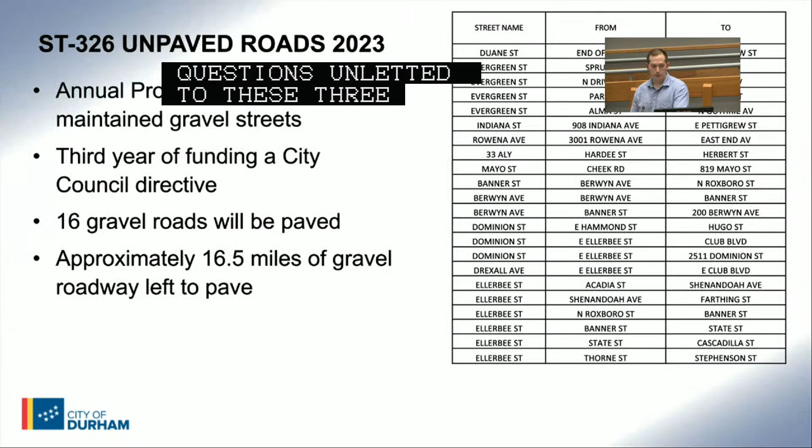So first, we have ST 326 Unpaved Roads for this year. It is essentially us repaving all gravel roads or unpaved roads within the City of Durham. We get an annual allotment from the City Council. It is in its third year of funding, and we will be paving 16 gravel roads this year.

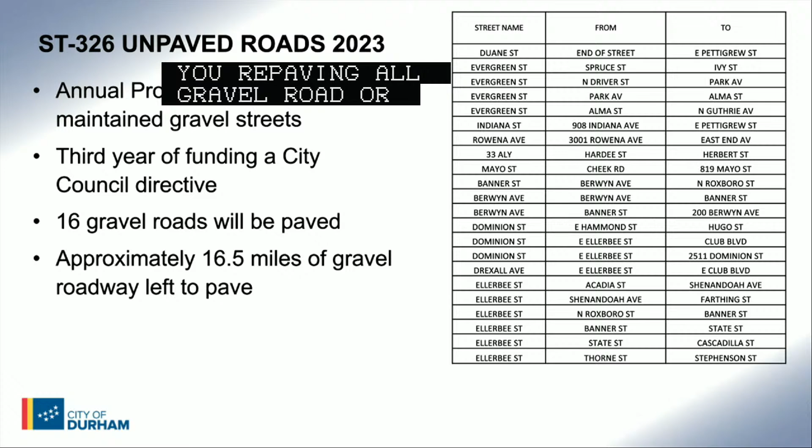We have it broken down on the website: street name, from-to intersection, all of them are gravel. We have approximately 16 and a half miles left of gravel road in the City of Durham to pave.

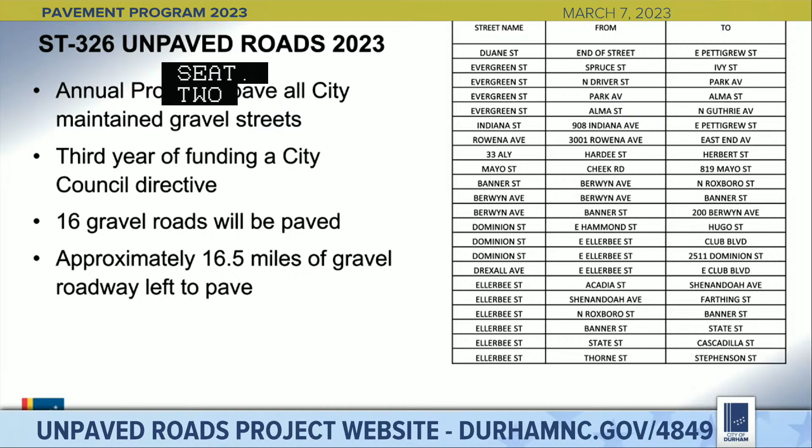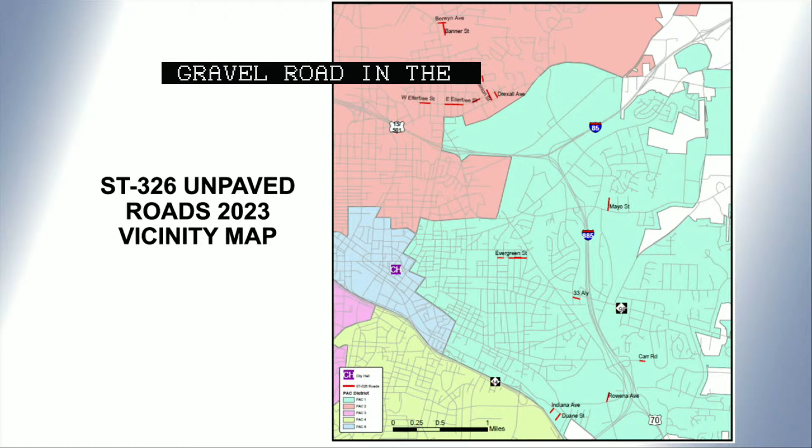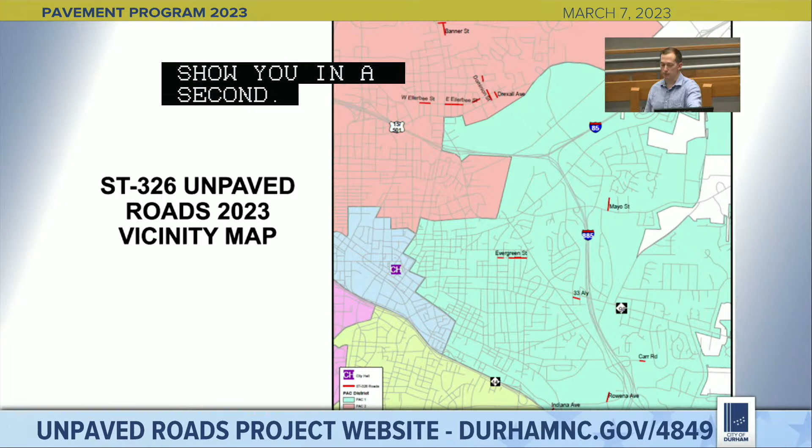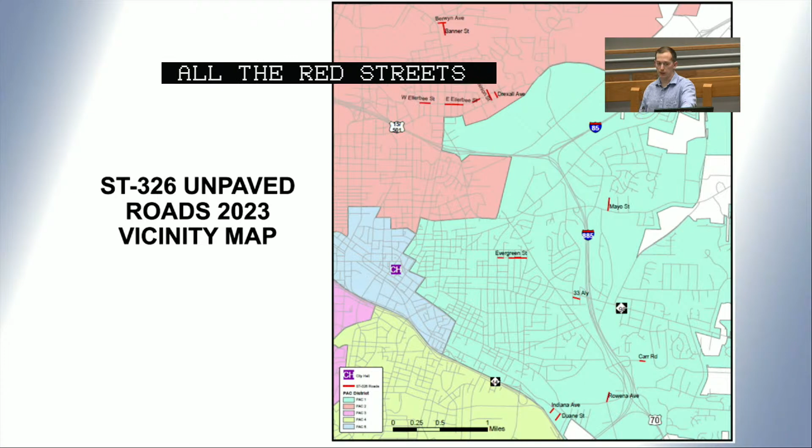This is the vicinity map. All three of these projects have a map on the web pages that I'll show you how to get to in a second. This is the ST 326 map for this year. As you can see, we are in the northeast part of Durham. All the red streets are labeled with their names, and those are the streets we are planning on repaving this year. Also, the colors denoted on this map are the PAC districts.

Project information: our contractor for lowest bid was Carolina Sunrock. We have consultant inspectors on this project, which is Summit Design and Engineering. We also have myself as the project manager for all three of these projects. The consultant for the inspection is the same for all three of these projects as well.

This is the project website, and I'll show you how to get to that real quick. In order to get to any of these project websites, you can go to the City of Durham homepage. Once you're here, you come up to Departments, and you click, and you come down to Public Works.

This will be the web page that shows up when you get to the Public Works Department. From here, you'll have the tabs on the left side. You want to come down to Construction, Design, Projects Active. Then on this page, all the projects are broken down into categories. This one is new sidewalk and trail - these are all of our active construction, design, or construction projects. Then you'll come down to street repaving, and you'll see that we have ST 324, 325, and 326.

Right here, for the sake of this example, we'll go to 326. On this page is where you can find a lot of the project information you might have questions on. You'll see the title at the top, then you'll have the project manager - in this case, it's me - and this is my phone number and extension. If you click this link, it'll take you directly to emailing me at my email for the city.

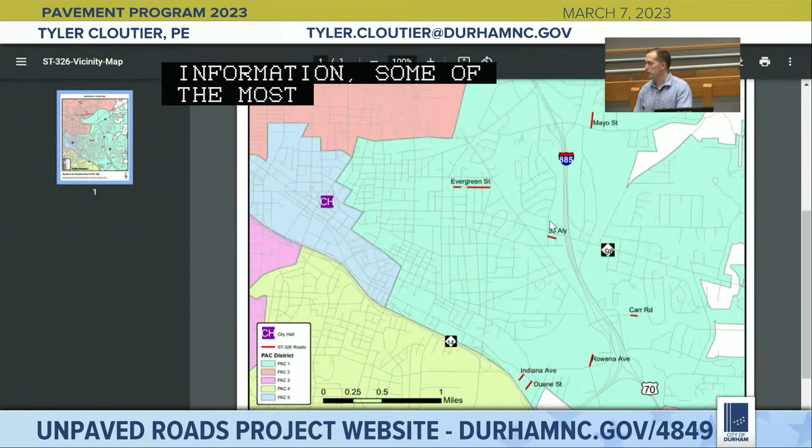Then you'll have a project description underneath that shows you what the project scope is, a rough project schedule with anticipated dates, and the project status. And then, most importantly, on the right side, you'll see we have project information - all sorts of information. Some of the most useful information is probably the street list and the vicinity map, the same map as what I just showed you, online on all these web pages.

And we'll be taking any questions that you might have for this. Any questions at all on this one? No? We're all good? Okay, all right. So with that, I guess I will move on. Anybody have anything to say on this before I move on? Clint? No? Nothing? All right.

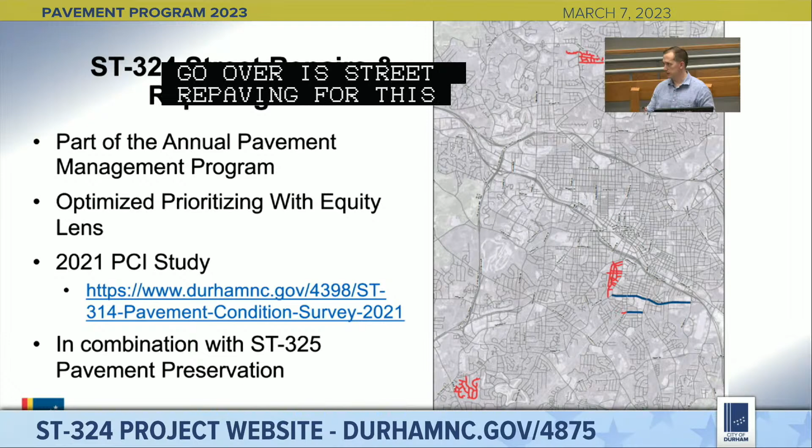So our next project that we will be going over is ST 324, street repairs and repaving for this year. It is your typical mill and fill repaving operation where we take off 3 to 4 inches of the surface and put back 3 to 4 inches, and you end up with a new road.

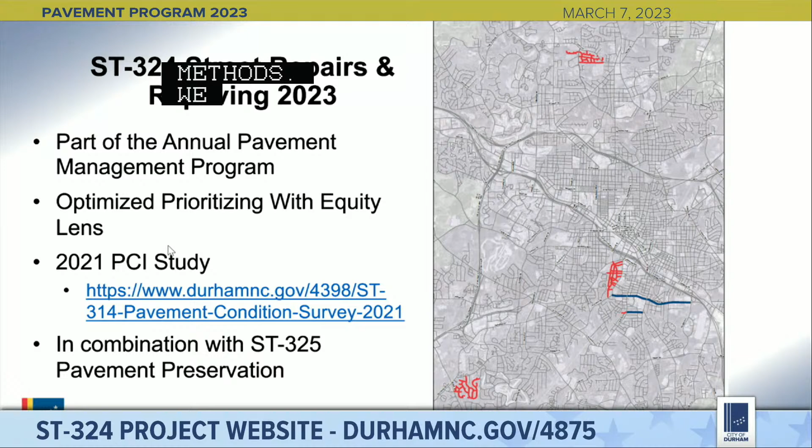This is part of our annual pavement management program, where we want to extend the life cycle of our pavements and save the city money by using various methods. We select our streets via a pavement condition index, which I'll talk about in a moment, and we select them through an equity lens.

So the pavement condition index is a PCI. In 2021, we had a PCI study done to get data on all of our roads and get a condition of the roads from 0 to 100, 100 being the best. It helps us select and identify roads to repave or preserve for the following years.

This work has to be done in combination with ST 325 for us to reach our goal of extending the pavement cycles of these streets within the city of Durham.

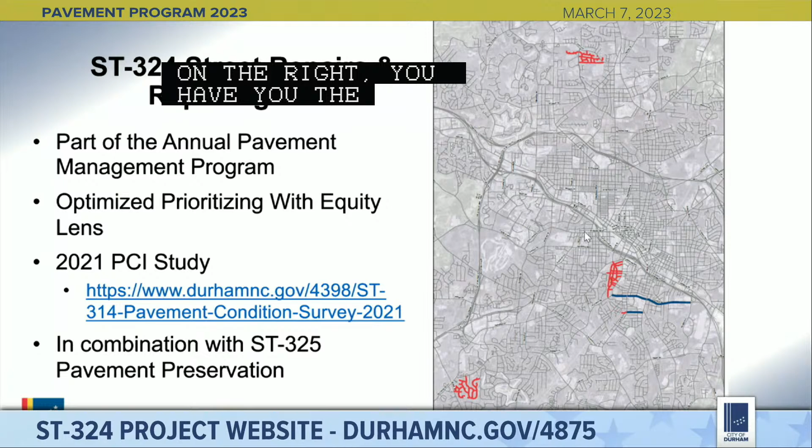On the right, you have the vicinity map for the roads to be completed, with what treatment they will be receiving. You can find that on the web page for ST 324 - same way I just showed you, just select ST 324 instead of 326, and it's on the right.

Project information for this contract. Our contractor with the lowest bid was Carolina Sunrock, same consultant, Summit, and same project manager, myself. This is the project webpage if you would like to see any up-to-date information on the project.

Anybody have any questions on this project? Yes, sir. Do you mind if I grab them? Oh, yeah, do you mind walking up to the microphone? Is that okay? Yeah, that's fine. Okay, I was going to say. Oh, okay, that works, yeah.

It works fine. Hi, I live in the Dover Ridge neighborhood, and the prior PCI survey that was conducted, I think 2016, 2017, our roads had a worse rating than the rating that came on this last one. And I'm wondering, if you're using this new one to judge the roads, what value did the last one have if you weren't really relying on it anymore?

So it's a combination. We are relying on that one where we're showing a progression. Sometimes, especially if a neighborhood's pretty stable, you might actually see it change because we did change the methodology a little bit in the way we did the new PCI study. So some of the roads actually appeared to improve when they really stayed the same. So we are showing a progression.

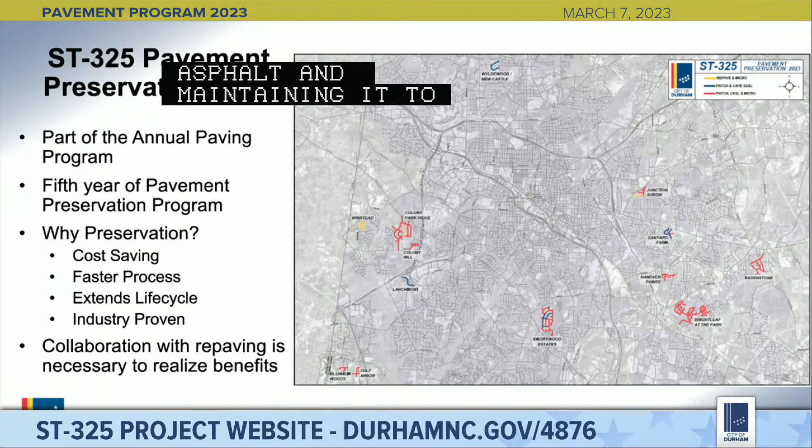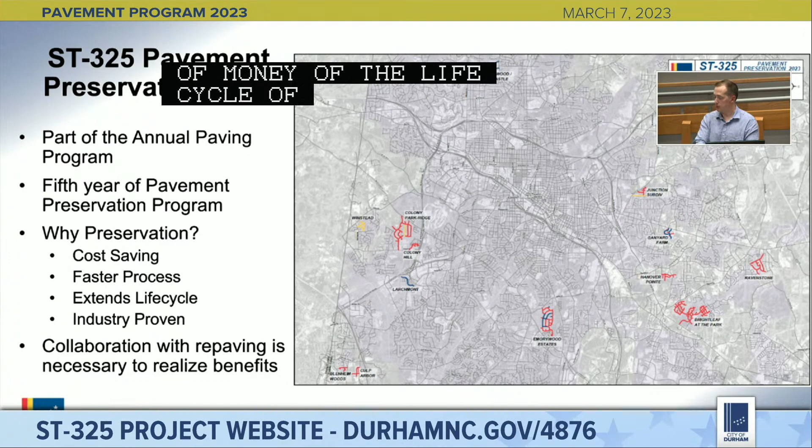Pavement preservation is essentially sealing the asphalt and maintaining it to extend its life cycle. A typical mill and fill operation like ST 324, without us doing this pavement preservation, the life cycle typically ends at 20 years. We are working on using this to extend those life cycles out to 50 years, which will save the city a lot of money over the life cycle of a road, and hopefully mean we'll be able to get to more roads per year, and we won't have to spend as much money rebuilding roads.

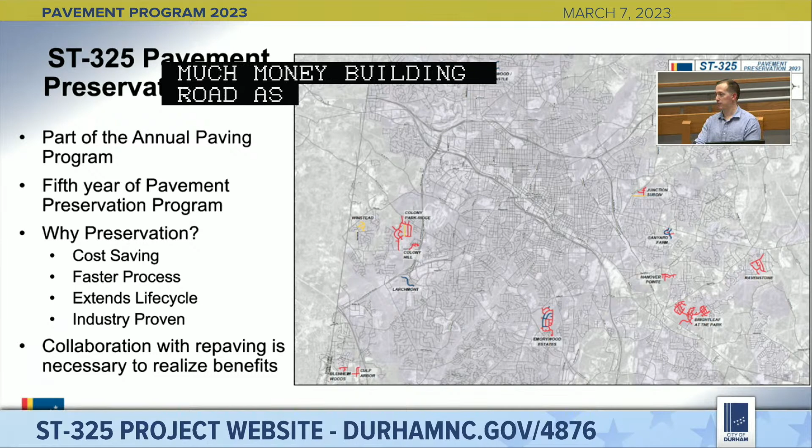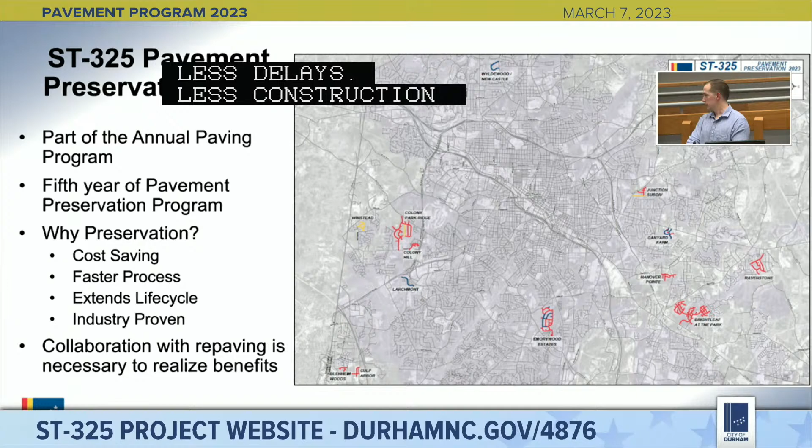So why preservation? Like I said, cost savings. It is 4 to 5 times cheaper to do preservation than it is to repave a road. It's a faster process, meaning less delays for the community, less construction traffic, less lane closure time, and it extends the life cycle.

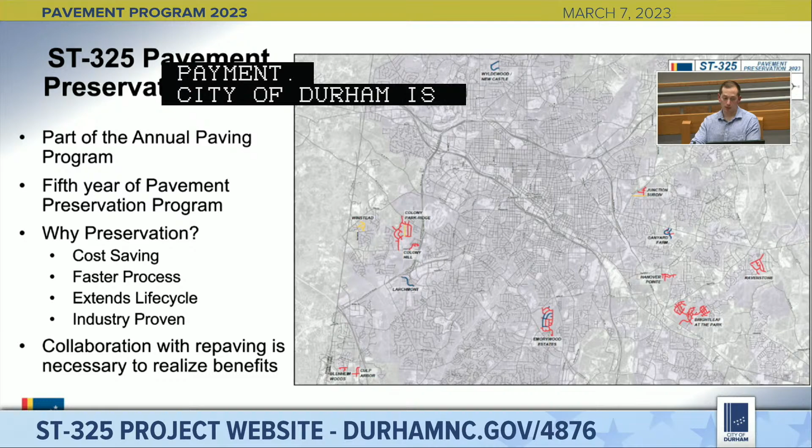This is also an industry-proven tactic to extend life cycles of pavements. It's used nationwide. City of Durham is probably one of the best in the state for its efforts on pavement preservation. And like I said on the previous slides, collaboration with repaving is necessary for this all to work as one and get to the life cycle goal of 50 years.

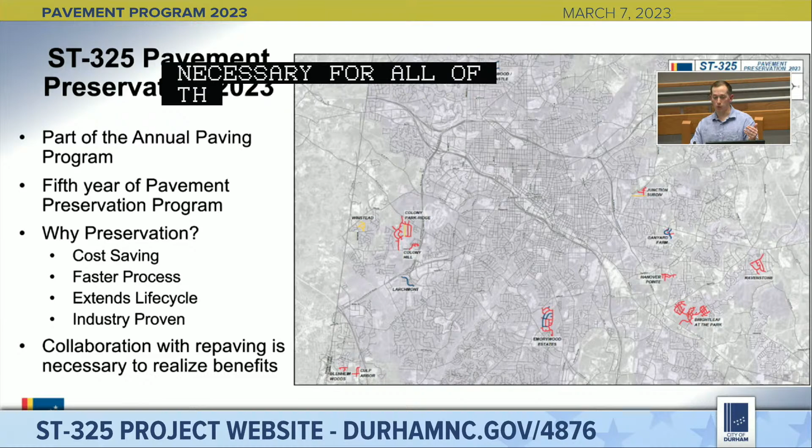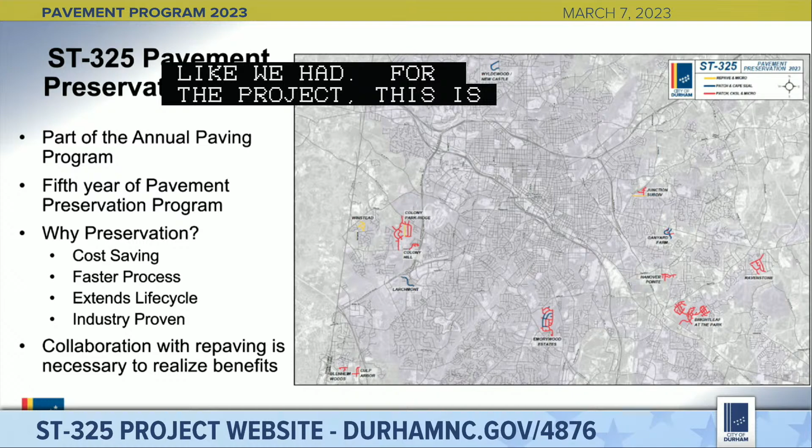For this project this year, this is the vicinity map up on the page. This can be found on the ST 325 website, along with all relevant project information, including my email.

Our contractor for this project is Slurry Pavers. They were low bid. Our consultant is the same as Summit. Project manager is the same. The project website is here on the page.

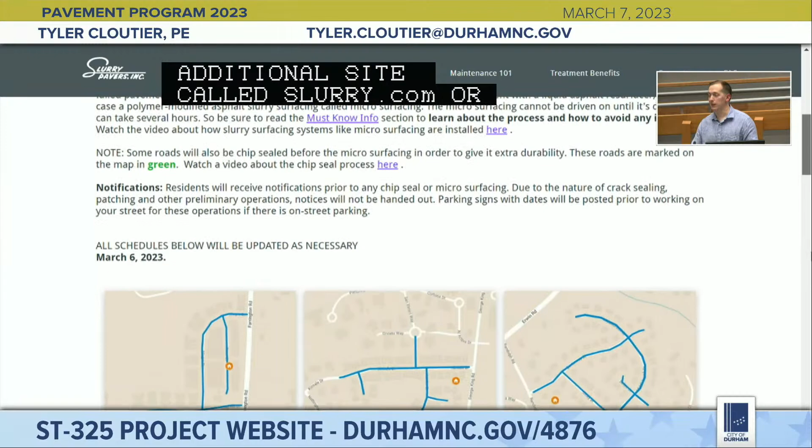We also have an additional website called neighborhoodslurry.com/Durham, but it's for Durham. This is a website you can use for very up-to-date and pretty detailed scheduling of what's going to happen within your neighborhood and when. There are all the neighborhoods listed, and there's dates associated with them, and this is the most recent update as of March 6th. So if you would like to go on there and check out your specific neighborhood, you could probably find a lot of the information you're looking for.

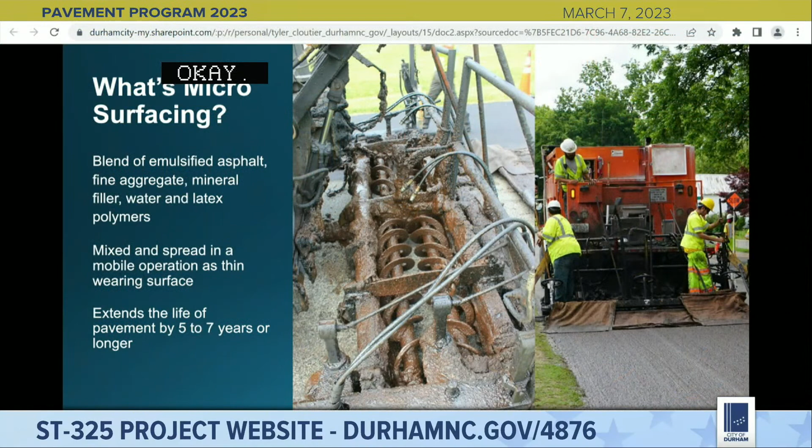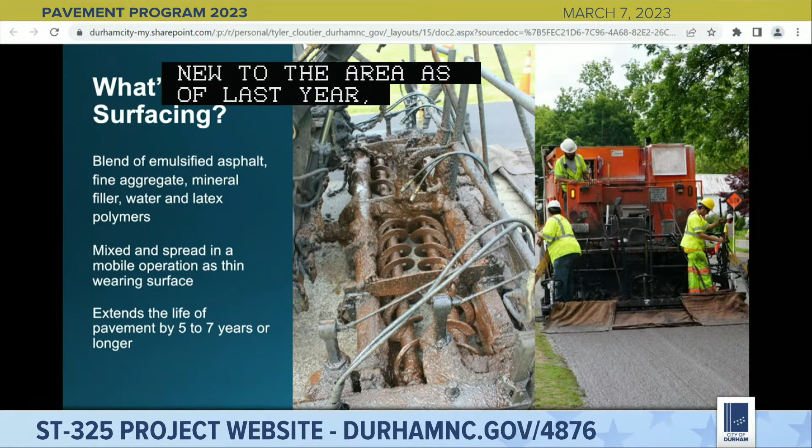Good evening, all. My name's Tim Herbst. I'm in charge of technical education and business development for North and South Carolina. New to the area as of last year, but been in the industry for over 25 years. I want to take this time to thank the city, Clint, Tasha, and Tyler, and administration for allowing us to partner with y'all. We're excited to again be back in Durham, and I want to show you a little bit about what microsurfacing and preservation is, and then why we do it.

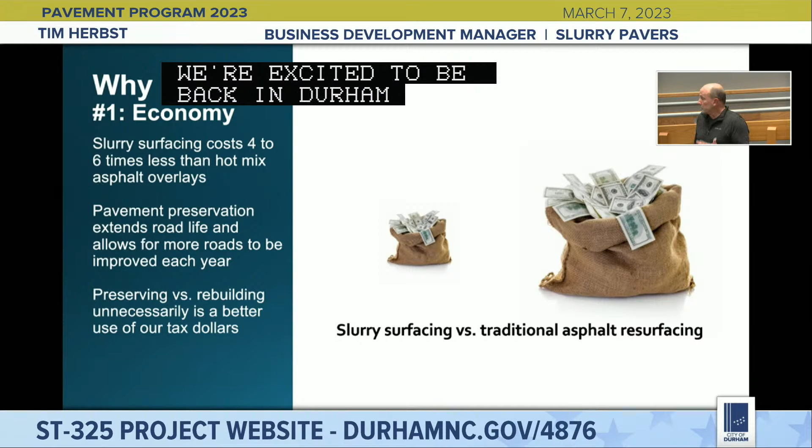First off, what is microsurfacing?

So we had the pavers in here, and we're basically taking a liquid asphalt cement, and we're creating an emulsion, which means that we're shearing in water into the asphalt. You do that, and think about getting grease on your hand, it's kind of hard to get off with water. How do you get that grease off? You introduce a soap, which in the industry is called a surfactant. So you blend that water and asphalt together to make an emulsion.

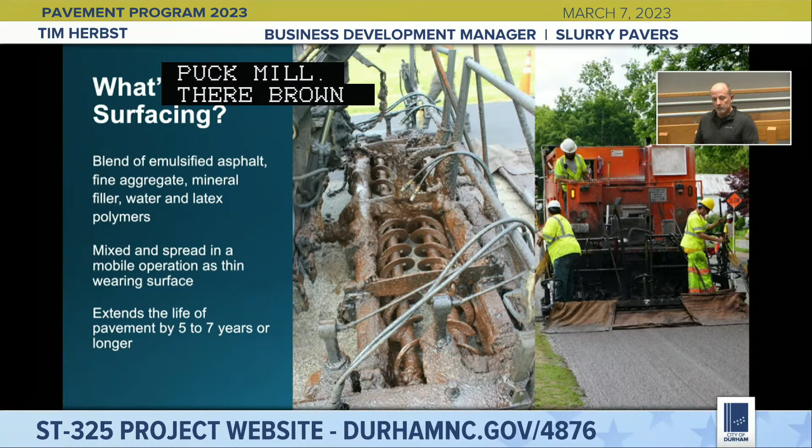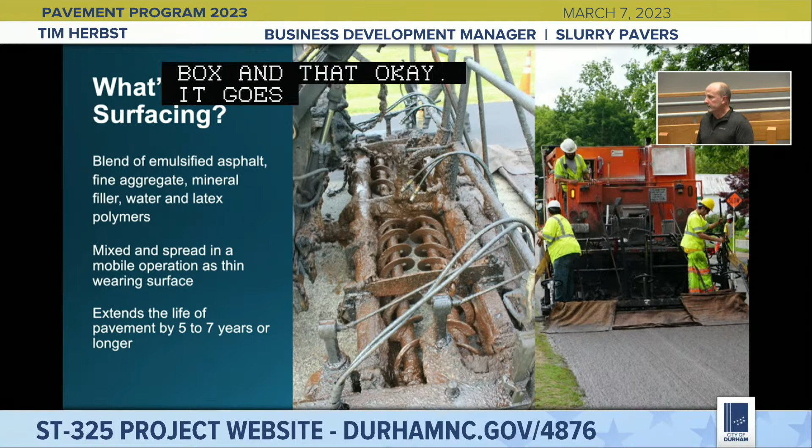It's mixed into the box, and as the paver goes down the road, very similar to a paving operation, it comes out the back end about 3/8 of an inch thick or thereabouts, and the design life is somewhere between 5 to 7 years. That's without doing any preparatory work to it. If you crack seal before it, or maybe do a chip seal before it, which the city calls Cape Seal, that life can be longer than that.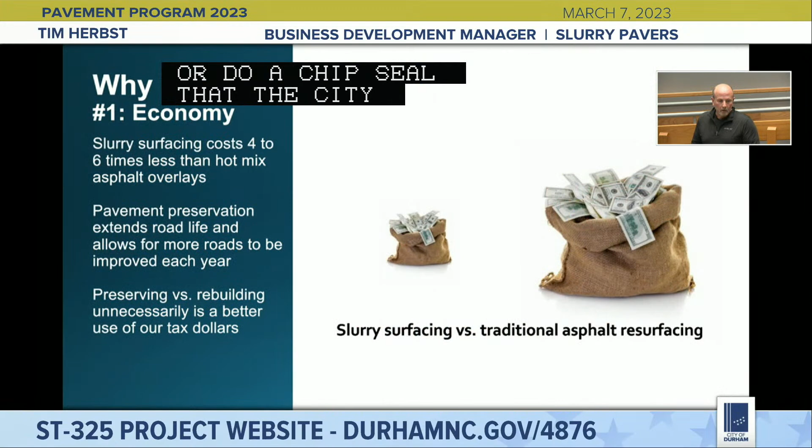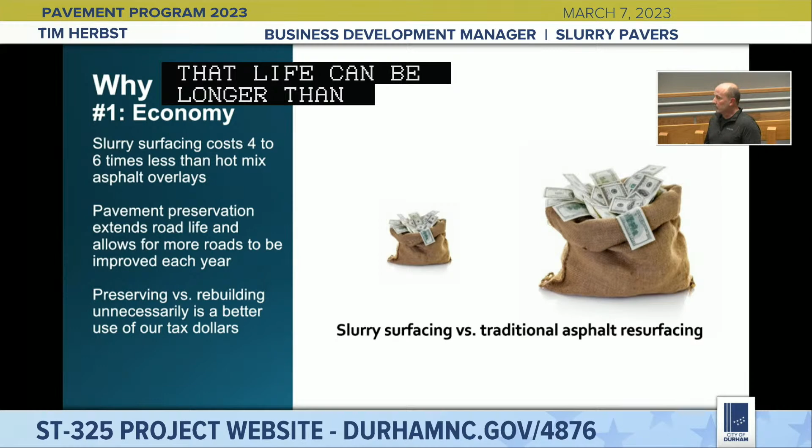Why do we do it? As Tyler alluded to, it costs a heck of a lot less than paving. The expensive part of asphalt is the liquid, so we're using a version of it that extends that product out so we can use it more economically and cover more roads, and that's the goal of preservation.

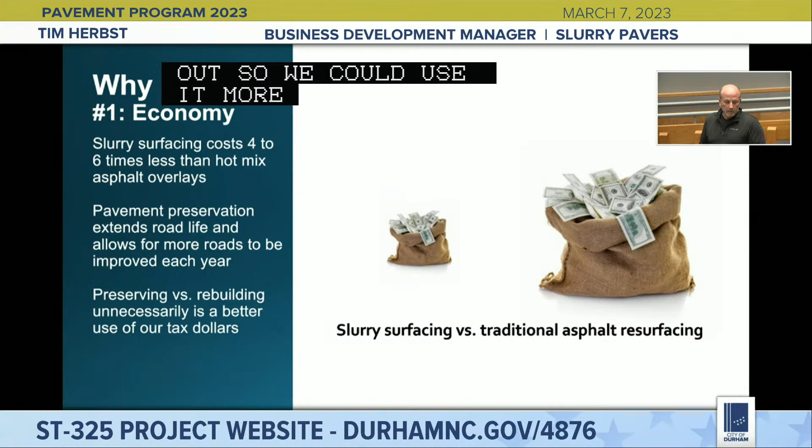Basically, when you see slurry surfacing, that's basically microsurfacing that we're doing for the city. So why do we do it? We follow the curve here on the left. You can see year 11, year 22, year 33, year 44, you're milling and filling, milling and filling, milling and filling. That doesn't include all the reactive maintenance that has to happen with pothole repairing and full depth repair, et cetera, which drives that cost up to about a little over $200 million.

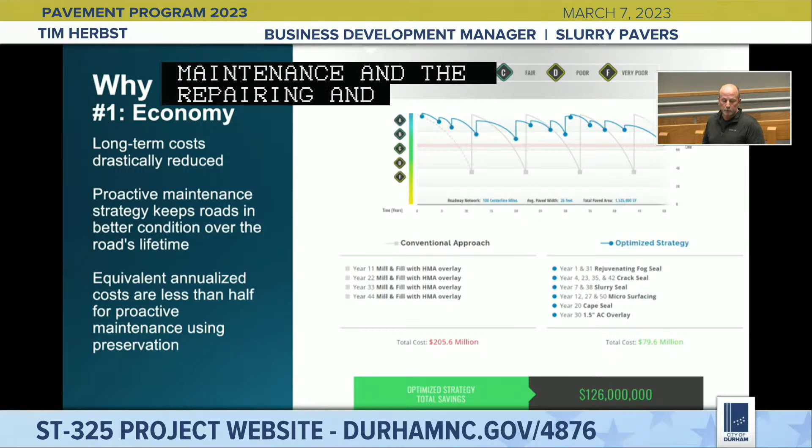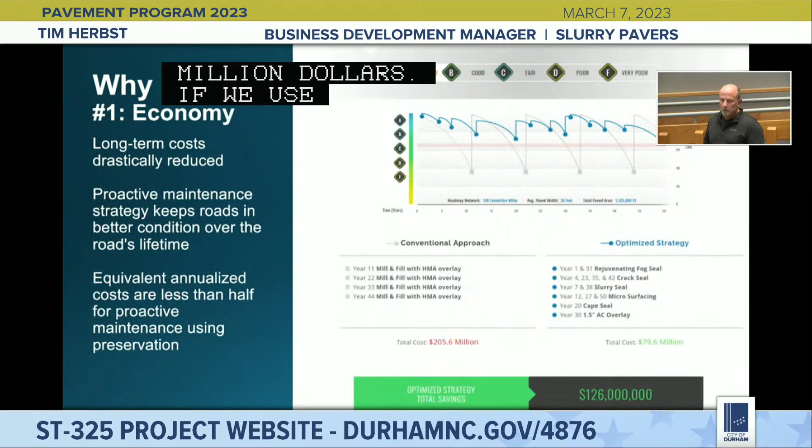If we use an optimized strategy where you're only incurring little dips in that, then you're not incurring those reactive maintenance type costs, and you're spending a heck of a lot less. That's the goal of all of it.

Safety. The reason microsurfacing was designed many years ago was to promote friction and get rid of skidding areas. There's a lot of studies through the National Highway Traffic Safety Administration that shows there's a 20% reduction in accidents. Canadian studies show reduction in intersection crashes, and MNDOT, Minnesota DOT, says 80% reduction in overpass accidents. So microsurfacing is used for that particular purpose.

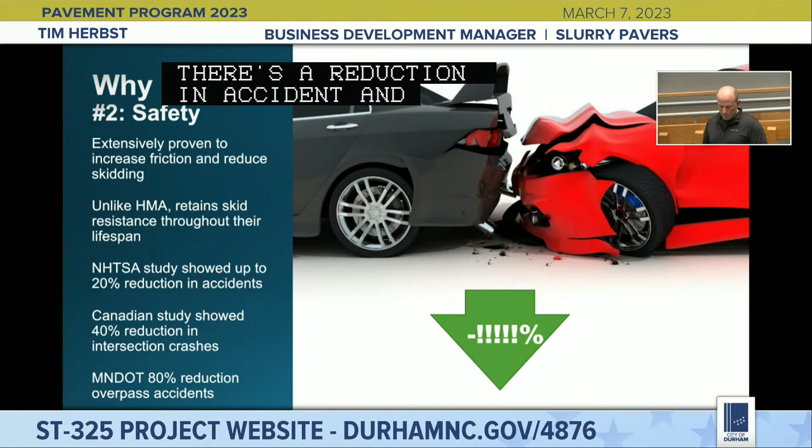A lot of people don't think of ecology when paving, but it's a very important thing to talk about, and the carcinogenic effect of paving. Microsurfacing is categorized as green, so it is very eco-friendly, a heck of a lot less ozone destruction compared to hot mix asphalt. You can really tell when asphalt's happening because you can smell it. With microsurfacing, you really can't. And that's that reduction in CO2, and just a good product to use in parks and in cities that are cognizant of their surroundings.

And do they really work? I want to show you what they call a tale of two townships. This is two townships in a different state.

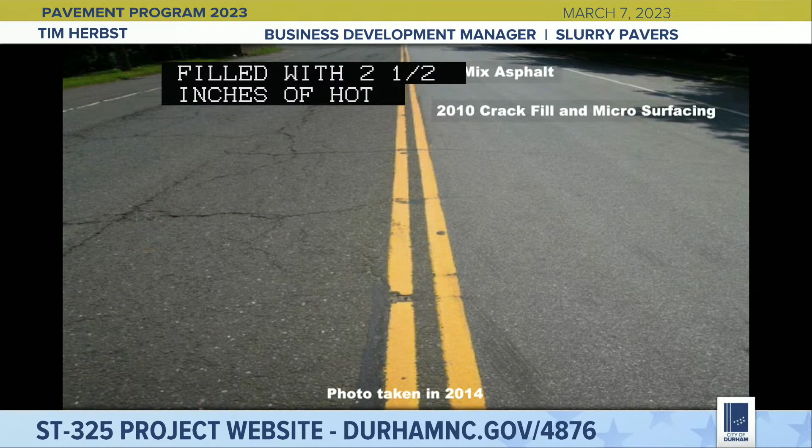In 2004, this whole road was milled and filled with 2.5 inches of hot mix. So staying with the same picture, the township on the right wanted to go ahead and do a crack fill and a microsurfacing. The township on the left didn't want to do it. And over time, it was shown here that after...

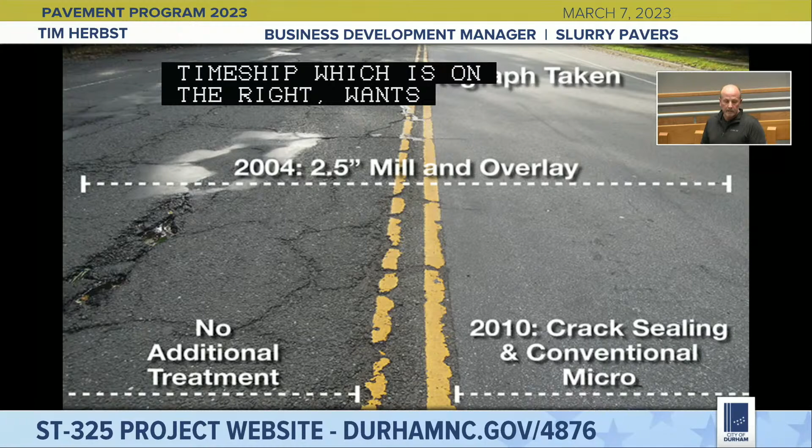2004 to 2018, so 14 years, the road on the right that received the crack seal and microsurfacing basically held up and is very serviceable, and still looks really good compared to the road that did nothing, which is now going to be very expensive to go in and repair, and to mill and fill. That's the reason for pavement preservation, to get more than 20 years out to 50 years, and this is how these products are used.

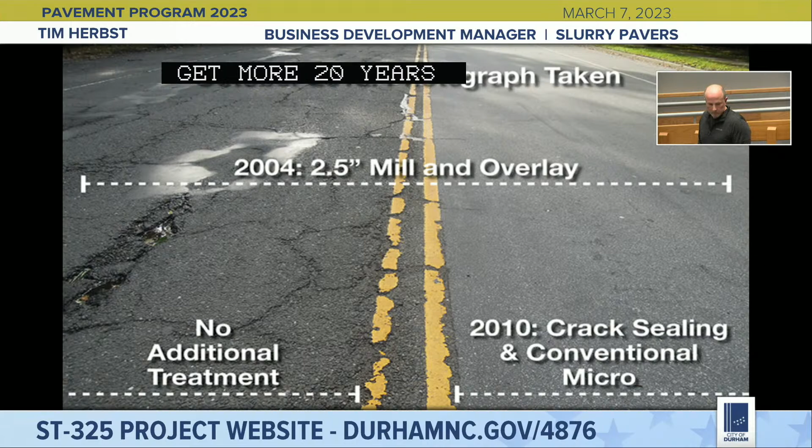So I'll hand this off to Matt, and he'll continue with the process. Does this work?

So to talk about the process—oh, I thought it was pretty loud. To talk about the process, it's very unfamiliar for residents, so that's why we kind of go through it, because as everyone has said, it is a liquid, which means that when it goes down, you can't get on it for a while. So we go through the process, and that way it at least gives people some familiarity. Oops, stop—is this working? It's working.

Okay, so the process, we do a lot of communication because of that fact. Just to point out some of the things that we do: right now there's a direct mail going out that goes to everybody who is within our project area.

Is there a timer on here? There must be a timer. I'll speak faster. So there's a direct mail.

Then right before, we put a door hanger a few days in advance, so that's got a lot of information, and especially some tips and tricks we'll go through. If there's an HOA or a community group that we can identify, we always reach out to them way in advance so that they can start getting information out. If we don't have one, we made signs so that we can put signs up at the entrances to the neighborhood with that website so that people can go and figure it out.

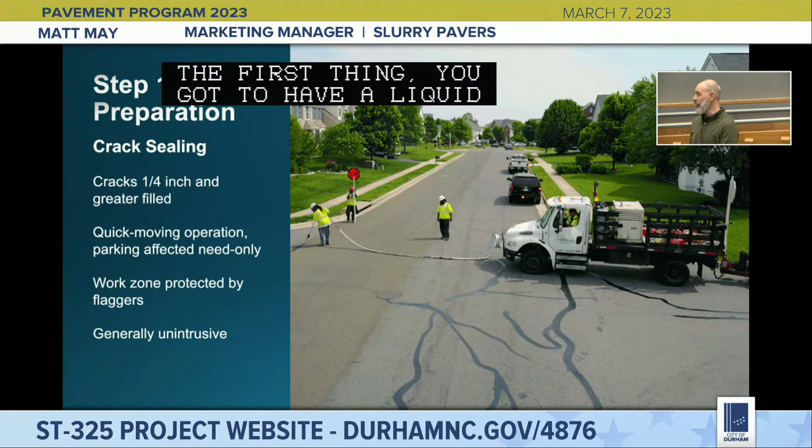It's weather dependent. All right, so the first thing is the crack seal. Basically what happens is you have a liquid, and you've got to have a good surface for it to go down, and that's why all these things will happen. The crack seal seals the cracks that are 1/4 of an inch or bigger. Anything smaller is either going to open up and get sealed the next time, or it's not going to, and it's just going to be fine.

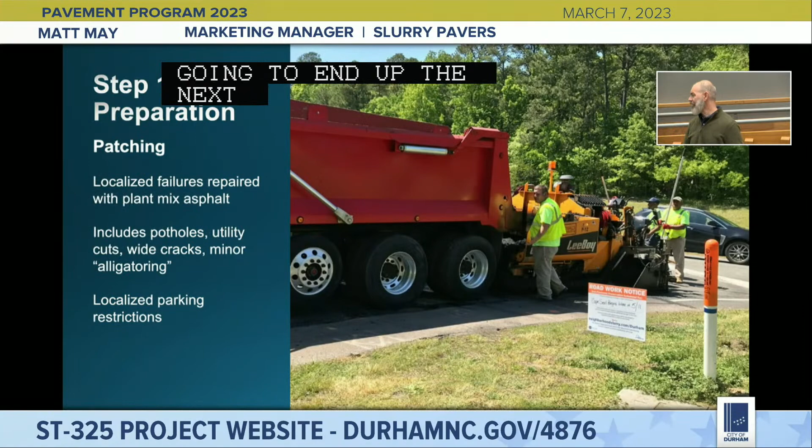Then there's the patching. So we patch localized failures, and that's, of course, any alligator cracking, or if there's utility problems or anything like that needs to be patched, then that gets taken care of.

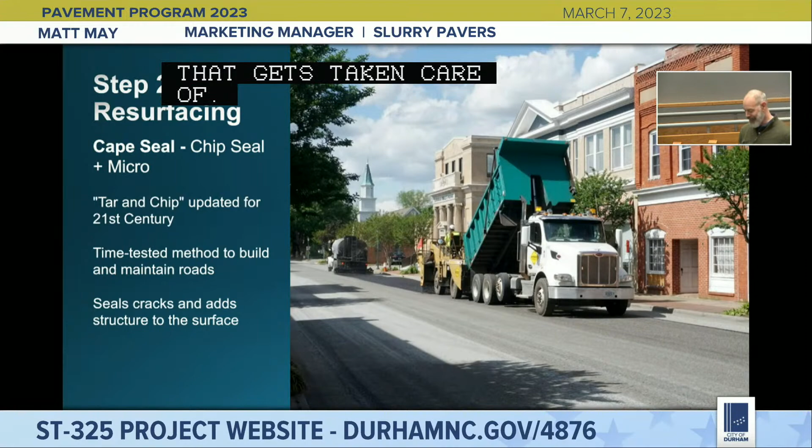Also the resurfacing. Now, the chip seal plus the microsurfacing is called a cape seal. The chip seal is kind of the preliminary part. A lot of people have heard of it. Step closer - oh sorry, I feel really weird with this. Okay, you may have heard of tar and chip. It's sort of like tar and chip for the 21st century. The process is improved, the ingredients are improved.

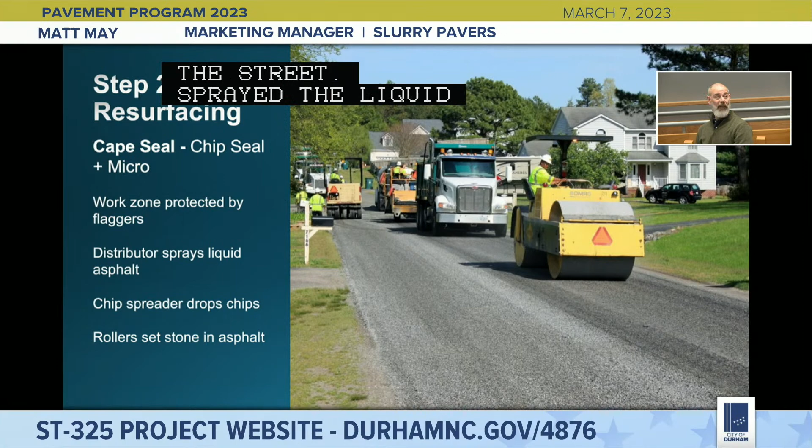The way it goes down is that the work zone is protected by flaggers, and then you have a distributor that goes down the street, sprays a liquid, and then it's immediately followed by a chip spreader, which drops the chips, and then rollers come and put it down. The nice thing about it is that it's immediately drivable.

This is the town of West Point in Virginia. We actually did their downtown in front of all the businesses, the churches, and everybody else.

The one thing you have to look out for with the cape seal, or that chip seal part, is that there will be some loose gravel, because they have to put a little bit of extra so that there won't be any bleed through that comes up and gets on everything, and the traffic will work it to the side of the road and then it gets swept up. It gets swept up good right before the slurry or the micro goes down, and that's usually around 10 days.

So now, when the microsurfacing is ready, this is what you might see on your street. You'll see the traffic crew will come out, and when you see the cones and stuff going out, you know they're going to be on your street that day.

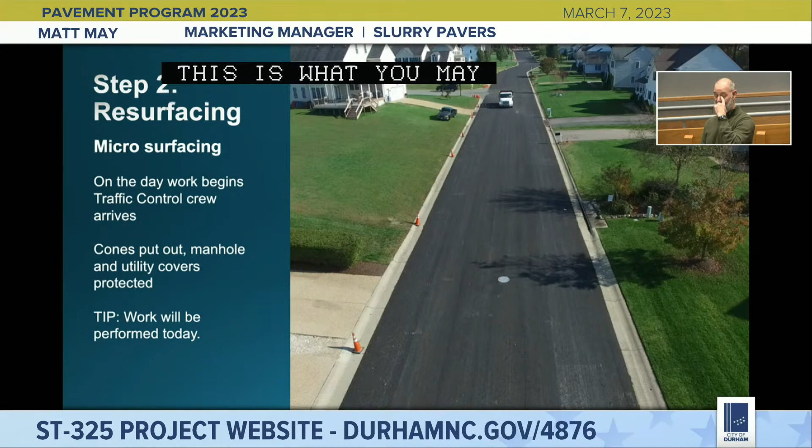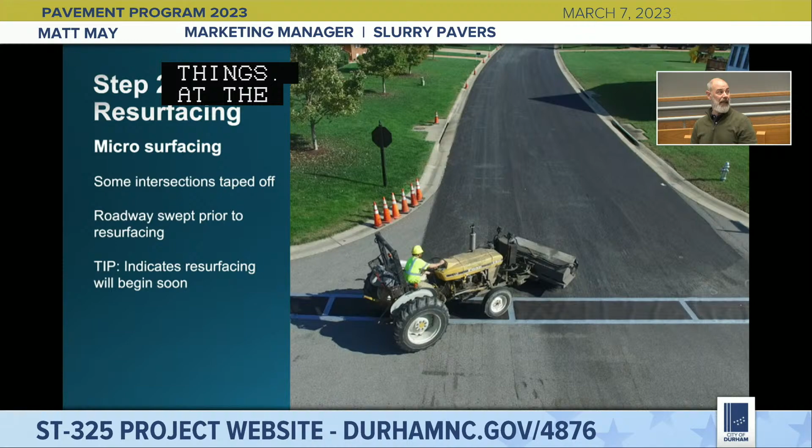They also are protecting all the utilities, the manholes, that kind of thing. And then at the entrances, they'll put some tar paper down and tape that off to give a nice straight line. So if you see them sweeping the road, because they do that to give a good surface, you know that they're getting ready to get on the street.

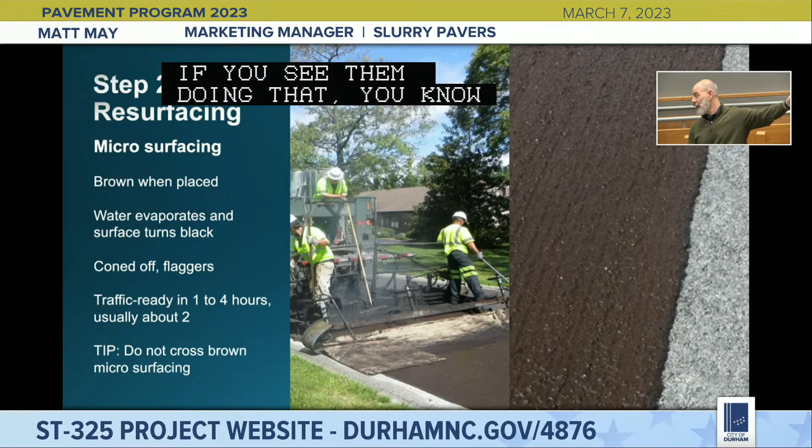So this is what it's like going down. You can see that's the brown slurry there going over a chip to create a cape seal. When it goes down, it's immediately coned off to help keep traffic off of it.

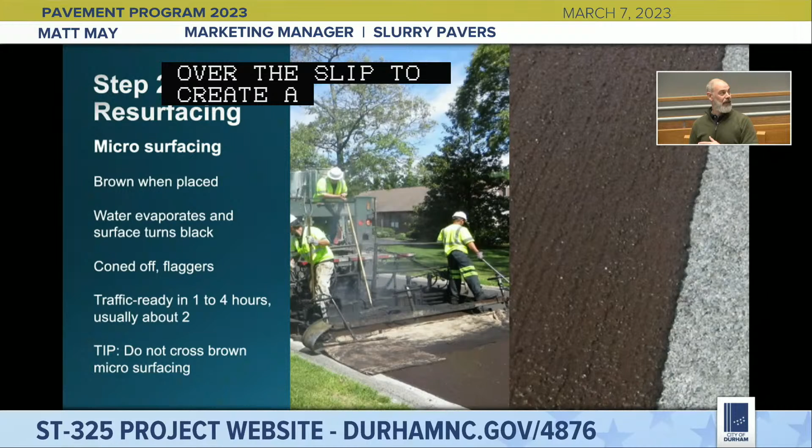And then there'll also be some flaggers around to help people get around. But the big important thing is to not get on the wet microsurfacing. And that's why we put the supervisor's number on the handout, so that if anyone ever gets caught, something happens, things happen, they can call the supervisor and say, hey, I got to get out.

I'll tell you a little secret. On a warm day, in about 30 minutes, it'll do what we call break. You can get out between 30 minutes to an hour, get out straight across without turning and not damage the slurry or get it all over. I would not cross immediately back up onto your driveway, because that's when you might leave some marks in your driveway.

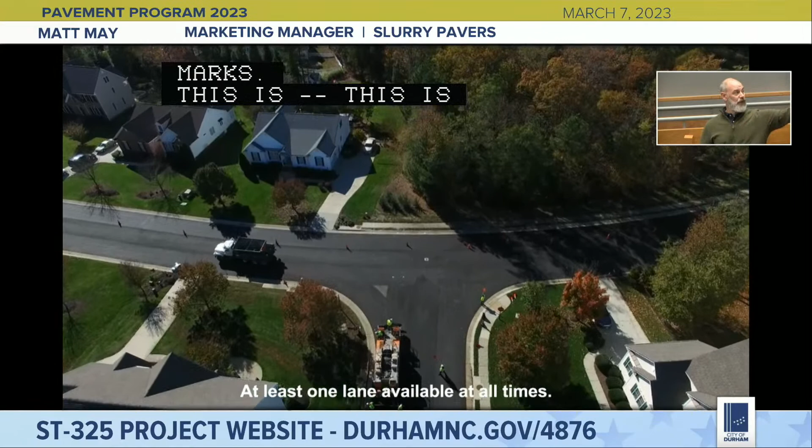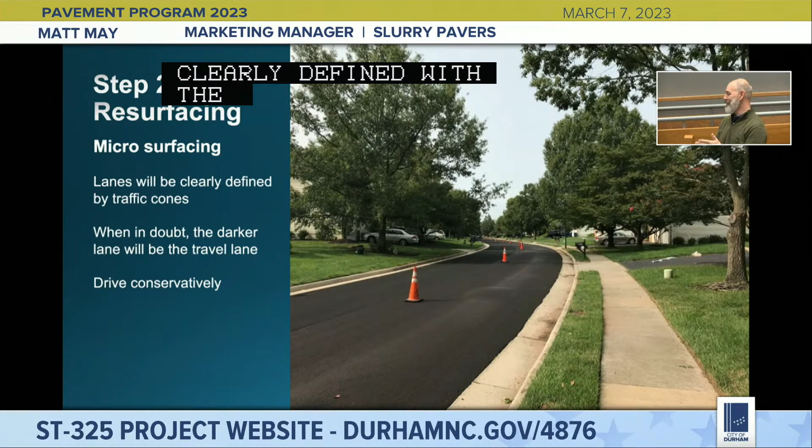This is kind of an overview of the operation. It's always good to remember, as you can see here, one lane is always left open. You can see that kind of pulls down. It's coned off where they've already done it on that one side there. And so that's kind of how the operation goes. The lanes will be clearly defined with the cones. If you're ever in doubt about what lane to be in, the darker lane is the lane to be in. If it looks a little bit wet or if it looks a little browner, don't go in that lane, go in the darker lane. That's definitely the one that's traffic ready.

Something to remember here, if you live in a cul-de-sac, sometimes the best thing for the residents is to do the cul-de-sac all at once, to only go in and not leave a lane open in that cul-de-sac, because we'll get in, we'll get out, and get out of their hair a lot faster. So if that's the case, if it's a smaller cul-de-sac, then they'll ask the residents if they would just rather do it that way, and then we'll do it that way. And then on the other side, you can see the darker side in the brown, but that's when a big cul-de-sac will do half and then come and do the other half.

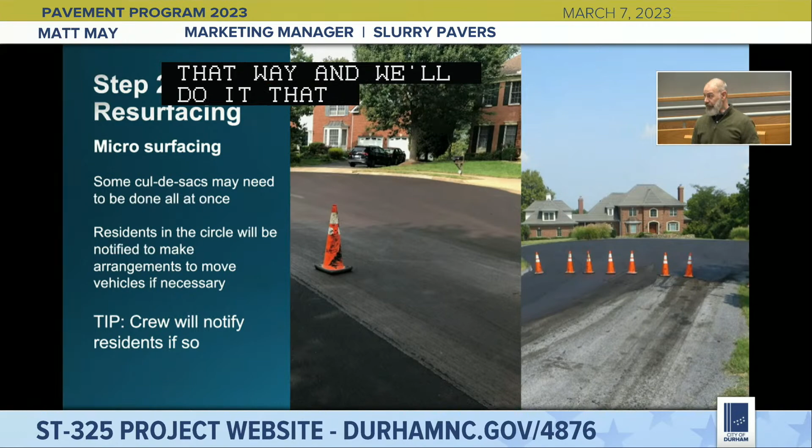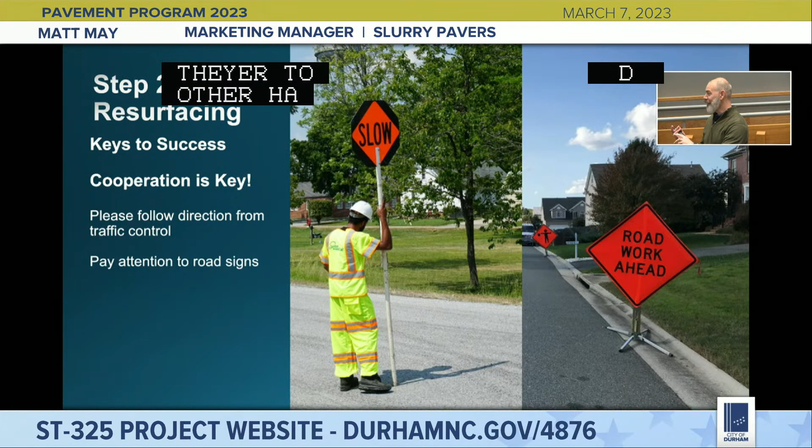Now, provided we do our jobs correctly and the material is all good, the biggest threat to the quality of the installation of a microsurfacing is going to be the people who live in the community. Less so the UPS drivers, the FedEx drivers, and all the people who would cross the cones. So we always ask for cooperation in every neighborhood that we're in to please stay out of the cones, because it doesn't just protect our guys or the surface, it protects your property as well.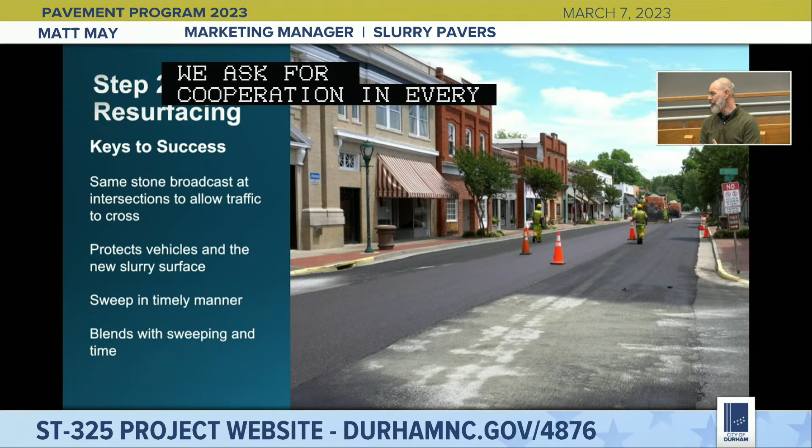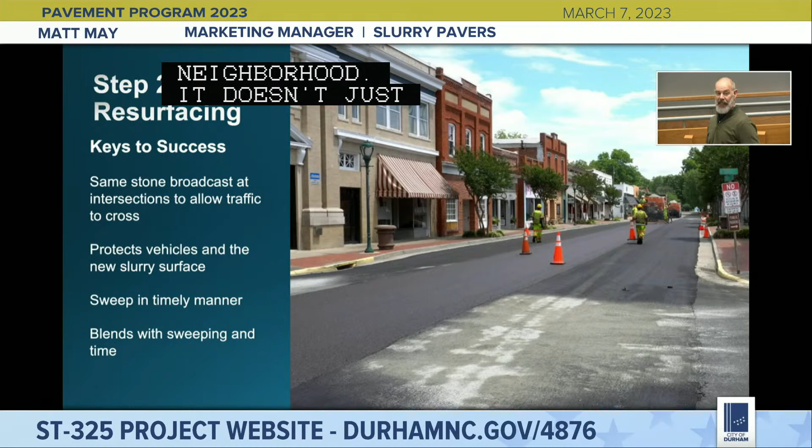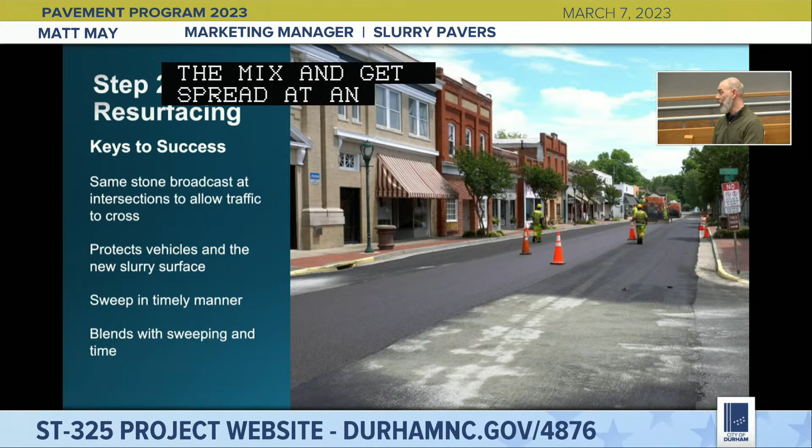When we can't protect it with cones, we'll do what's called sanding, and that is basically we take the same fine crushed stone that's in the mix, gets spread at an intersection, and it protects the vehicle, it protects the slurry, and then you can cross. That is something that can happen in front of your driveway if you do get caught, and you can ask a supervisor. It will stain a little bit though, but if it's swept properly and then it wears in a little bit, you can see it's fine.

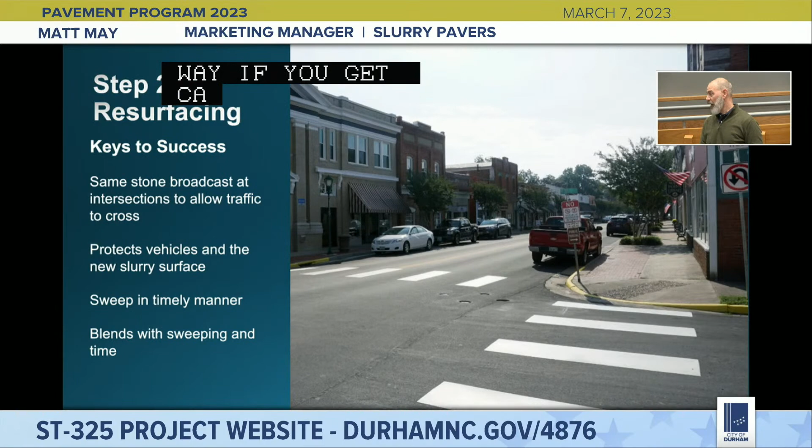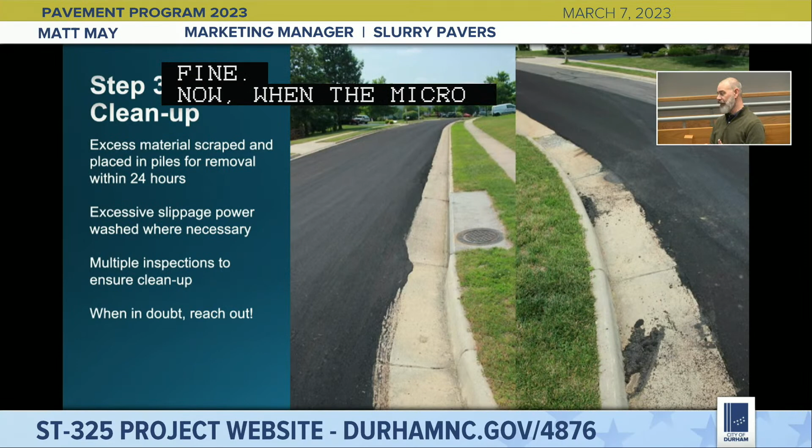Now, when the micro is done, the job isn't done. One of the things that can happen, and usually does, particularly around manholes or drop inlets, you can see where they always kind of do a little dippy-do. Well, liquids want to go where they want to go. So you might get a little bit in the gutter pan, and we will power wash that off. A little bit, you can see up there where it's a little bit on the side, that's not going to get cleaned off. But when it gets over into it like that, then that gets cleaned off.

You might see little piles like that. Those little piles are where they scraped it immediately and left it, and they should be getting that up within 24 hours. If not, there's lots of numbers. Call, we'll take care of it. We're here to do a nice job.

And the last thing, as far as all that cleanup stuff goes, is the ravel. So you can think of it like a blueberry muffin where, you know, if it's that liquefied emulsion and the stones in it, some of them are at the top. And when traffic goes on it, some of them are going to go down and some of them are going to ravel off. And they'll end up in the gutter pan. So we always allow like a couple of weeks to let that process happen. If it really needs to get swept up, you let us know.

We'll sweep it up early, but we usually go in about two weeks and sweep that.

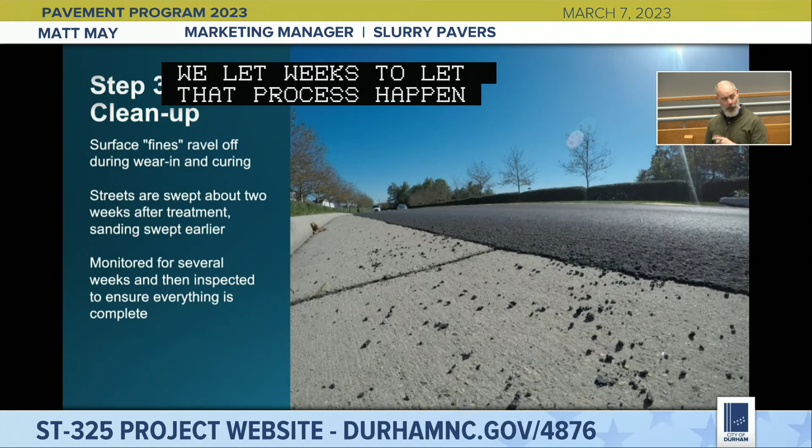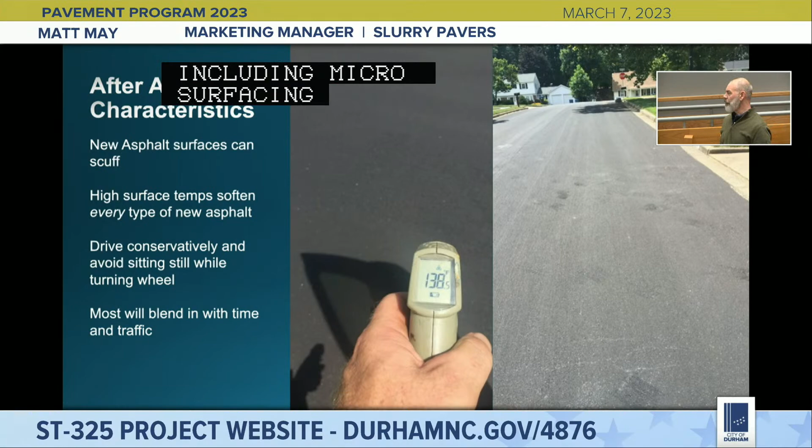A couple of things to remember about asphalt surfaces, including microsurfacing, is that they will scuff on hot days. We see what's called a power steering burn when people come out of their driveway and turn the wheel. A lot of people see it and think it's a deficiency of the microsurfacing, when in fact it's not. It happens to all surfaces.

This is a hot mix job we did the full depth reclamation on. You can see those burns. The nice thing about microsurfacing or a slurry seal is that because of the asphalt content, it will wear in.

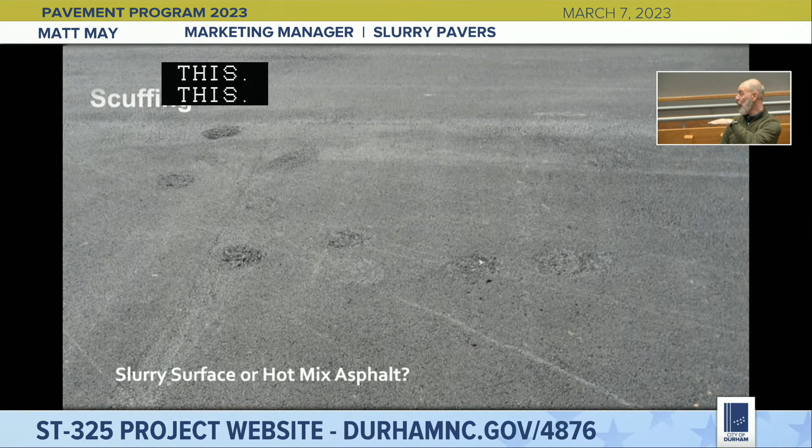I took this picture because it was the first year I worked for Slurry Pavers, and I said, I'm going to see if these guys are telling me the truth or not. So you can see three months later, you can just see those two tire marks.

Maybe you guys probably can't see over there, but you can see a tiny little bit of the drag mark. And then I was there six months later, and everything was gone. None of that stuff you saw earlier remained, and everything was smoothed out beautiful.

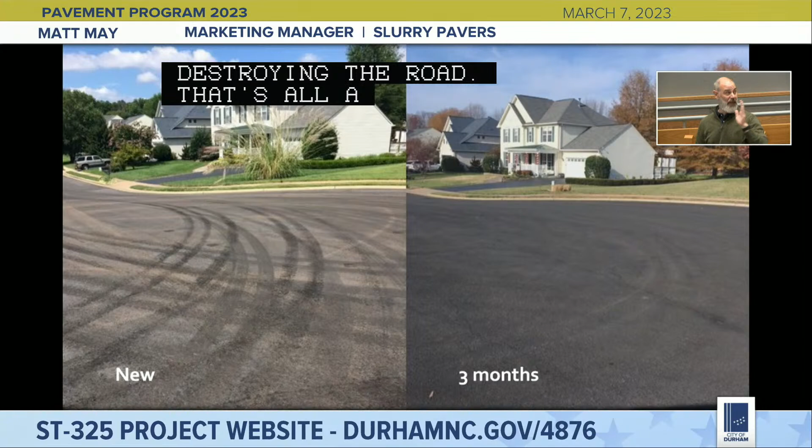So that's my story, and I'm sticking to it. Thank you.

Any questions? Oh, yeah. Yeah.

Hey, my name's Colin Curtis, resident here in Durham. I was curious, there was a graph showing the dips in quality with this preservation process, and I'm wondering, if it's protecting the substrate, the base of the road, what ultimately determines when it dips so low that you have to rebuild the road? You said it extends the timeline to fifty years, but just curious how that crosses over.

So it's a matter of... I don't think that's on. Might be muted.